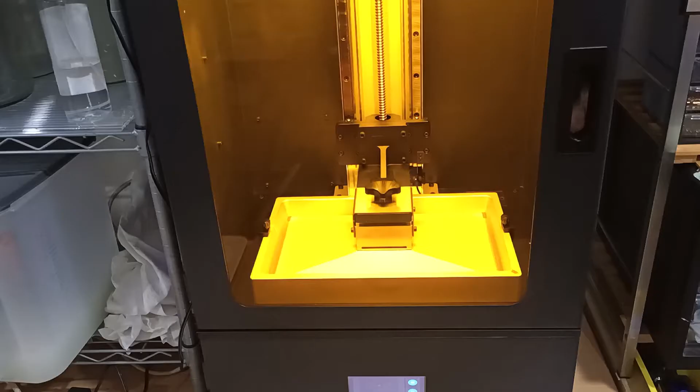So this is resin that I've mixed up for the vat that's currently printing. This is going to be quite a large print, and the resin in here from the previous print was getting quite low, so I just topped it off. After 2 or 3 prints, I top it off with about 300 grams of resin.

So this is the tail section that's printing at the moment, and I'm just pouring the resin straight into the vat. I pour it onto the build plate first and let it run off. This helps equalize the temperatures a little bit.

You don't want to be changing the temperature of the resin in the vat rapidly because you can shock the resin curing process and cause defects in your print layers, so you'd be able to see that. Pouring it over the build plate helps equalize the temperatures just slightly and reduce that transitional shock between temperatures in the resin.

So yeah, that basically covers how I mix my resins and why I mix my resins, and why it's a good thing that you should start doing as well.

If you're not making structural stuff, just making miniatures and stuff, stick with a cheap brand resin. I highly recommend Fast Gray or Fast White. They're excellent resins, great quality - the smell, the cleanup, everything about them is just so good. So I highly recommend the Siraya Tech Fast range.

Now, what else have I been doing? I talked about making some changes to the nose section and the end of the fuselage in the previous episode. I noticed some printing defects and a couple of things I missed, like for instance the closed cells in the internal structure for the end of the fuselage section.

So I've gone through in Inventor and made some changes. Let's jump in Inventor and have a quick look at that. All right, let's have a quick look.

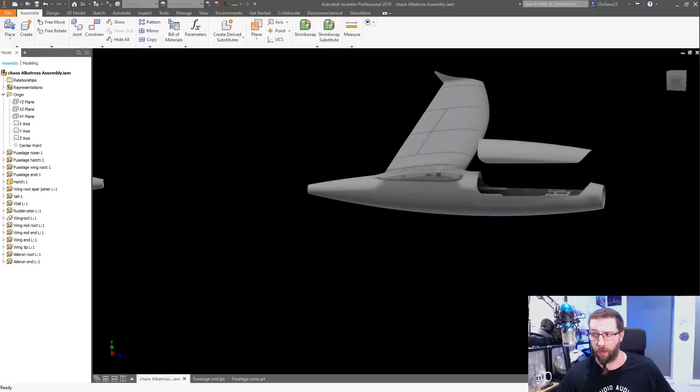So the reason why I wanted to make some changes was there were some printing defects in the tenon, the hole for the tenon for the hatch at the front here. I think it just gets a little bit too thin-walled there, with it still being hollow and 0.5 mil wall thickness around that area.

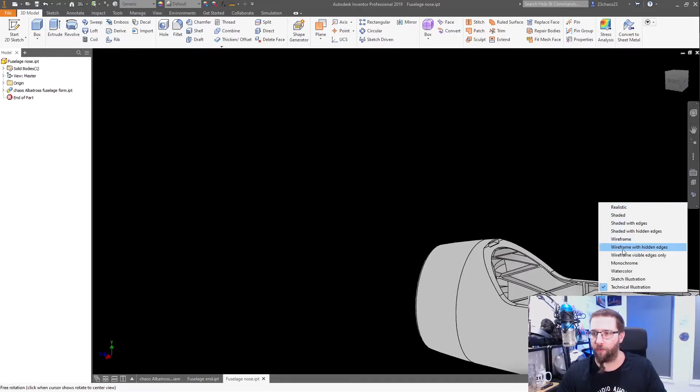So let's have a look at what I've changed. First off, I actually filled out a bit of that front section - let's switch to a view where we can see. You can see here, now this is all just solid material. So I created an extrusion and filled out this area. Now there won't be any cavities or anything generated there that would cause the print to fail.

There's a lot more material for the rest of the print around it, a lot more material around for the resin to cure to. So there shouldn't be any more issues there - that should work fine.

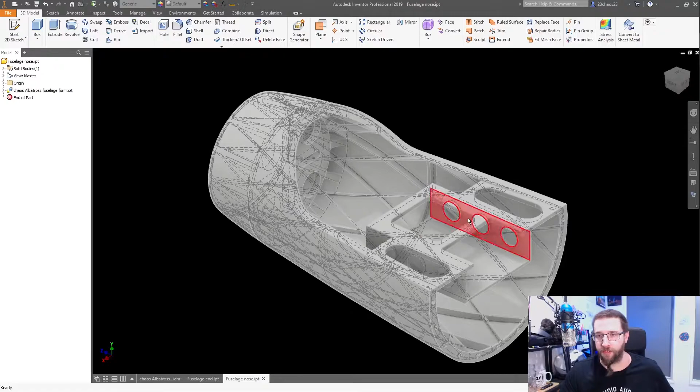The other things I've changed are this mounting plate for the gyro and the receiver. It is a transmitter-receiver because it can handle telemetry - it's the FrSky telemetry 6-channel micro. I won't be using telemetry though, I'll just be flying it as regular.

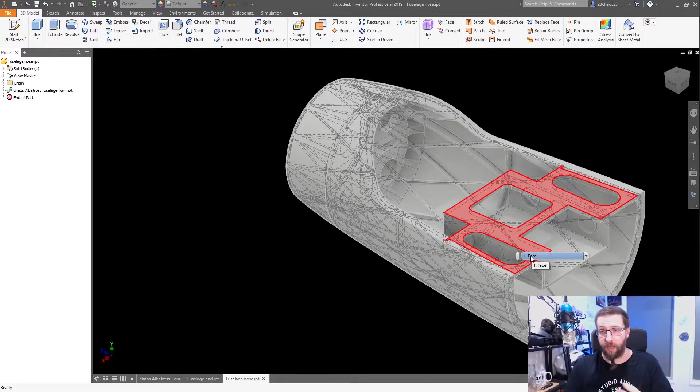So I've created this slot now. This holds the gyro just fine in that little socket there, and there's a space here for all of the JST connectors for the wires and plugs - they come into this section here.

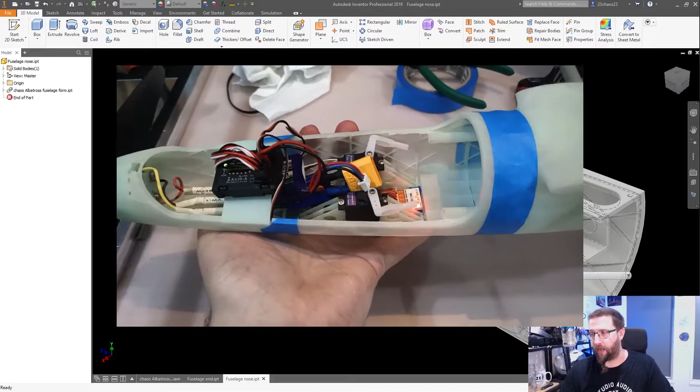The reason why I dropped it down was because when the hatch comes down, those JST connectors are quite tall. They stick up quite a bit and interfere with the hatch closing properly. So dropping it down helps stabilize it and hold it in place, and then I don't have to use the sticky stuff and I can remove it if I want.

So that should be a nice snug fit - I've created the tolerances to be just right. If not, I can always add a little bit of tape to one of the sides of the gyro and it will slide in there nicely with a bit more friction fit.

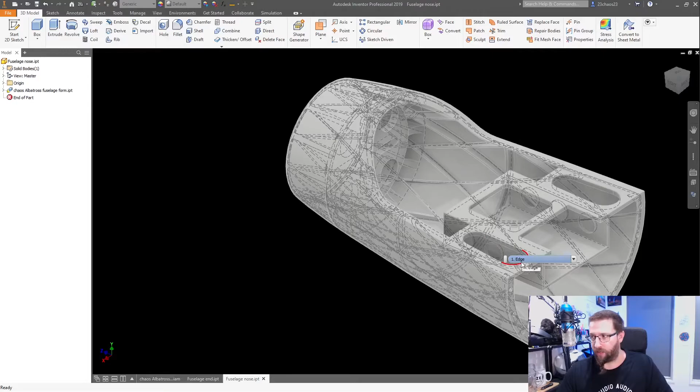There's also this panel opening here. This is to access the DIP switches on the gyro face, as well as the adjustment dials for adjusting the gain on the different axes. I've also thrown in some holes to make it a bit lighter, but all in all, that is looking good.

So this is exported out as an STL. It is ready to print. It is in a build file, a sliced file with a bunch of other stuff.

Let's have a look at the tail. So on this section, there were some closed cells. Let's just jump into this view. Nope, that's still too hard to see, there's a lot going on. Okay, that's a little bit easier to see.

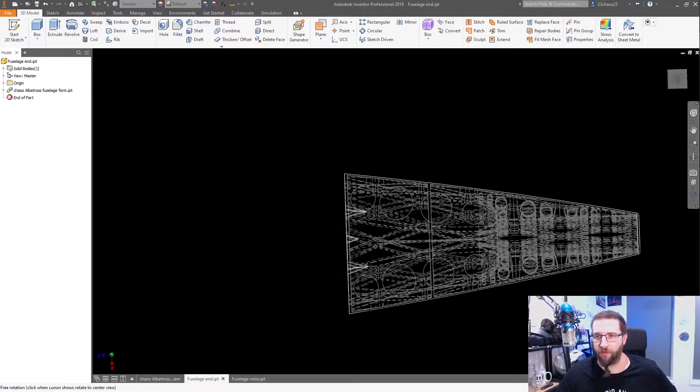So the issue I had was these diamonds here, where the mouse is - they were a closed cell. So they were filling up completely with resin, and I had to go in afterwards and poke holes to try and get the resin out, and it kind of just turned into Swiss cheese. So instead, I fixed it.

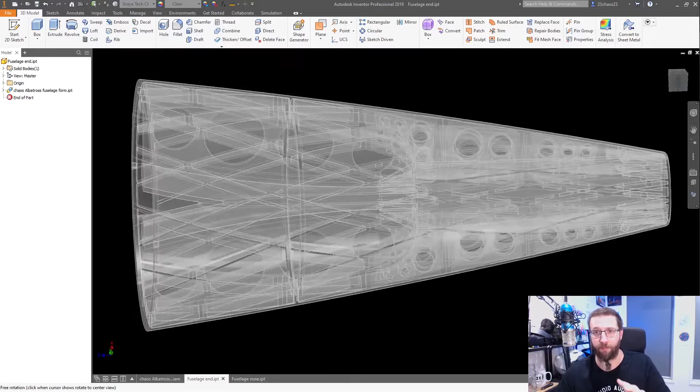So what I've done is I've added holes everywhere. I've made this a hell of a lot lighter by adding in a lot of lightning holes, or lighting holes. I don't know what the correct terminology is.

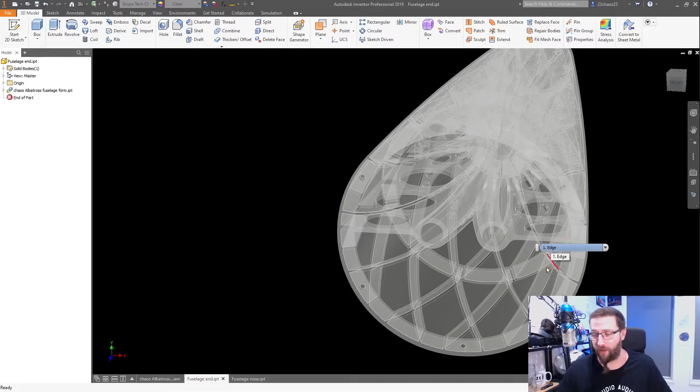Is it lighting or lightning? Lightning is another thing. Lightening? Why is it so confusing? Why do we not have a word dedicated to making something lighter? We don't - as far as I know, there's no word in the English language that says making something lighter. You have to say making it lighter, or lighter. Lighter is a lighter. Lightning, it's the word. I hate the English language. Everything's so interchangeable, it's really annoying.

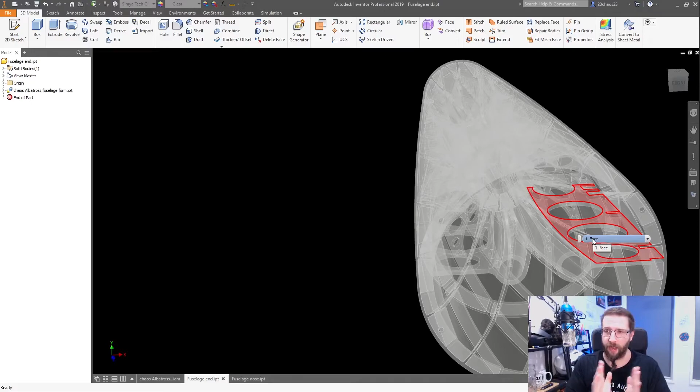I've also gone and added some holes here on these sections here. I would like to have done it on the rest of the fuselage as well, but that's already printed - there's nothing wrong with it. And having a bit of strength there on the sides for the wing root section is actually a bonus, so we're going to keep that as is. All in all, that's much better now - it's a lot lighter. So that covers everything in Inventor.

I've made some changes to those two pieces, so the fuselage by tomorrow should be finished and done, and that would be great. I can start doing an assembly, and then we can work on the Albatross build video. I've been putting it off because I've been waiting until I've got at least a complete section that I can then film putting together. I've already put together the mid section, or the hatch section, of the fuselage to the wing root.

I couldn't, and I didn't record any, so I'm sorry. But I'll be able to record the nose and the end sections being attached, and we can get that going. And then we can talk about why I did some changes in that, and that'll be a more comprehensive video talking about the Albatross. So yeah, that'll cover it for today's episode.